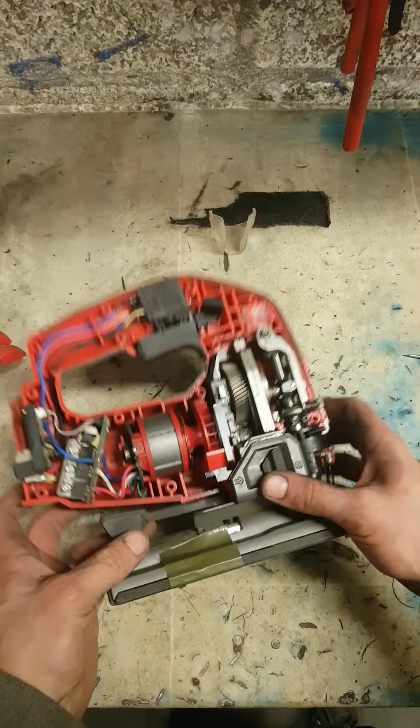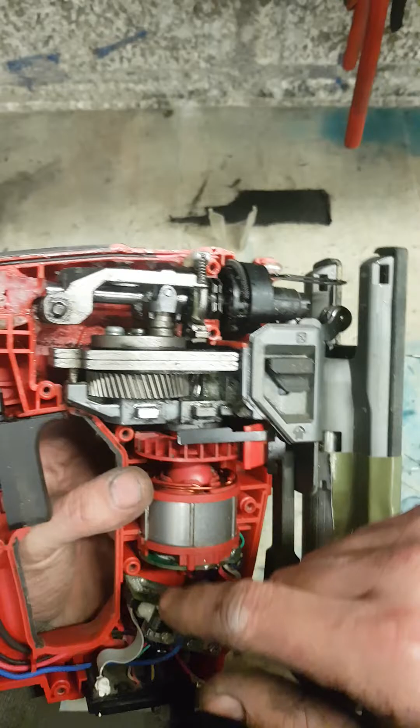Jesus, there's not much to that one. Tiny little motor. Not even an actual enclosure or nothing for the gearbox. Same as the wee cheap Bosch one.

See, this is why I have problems with Milwaukee. Motor assembly is gone on this jigsaw. This part here, not worth fixing. It's going to cost about 170 quid to change this here. Because it's brushless, no big surprise, you buy this whole assembly.

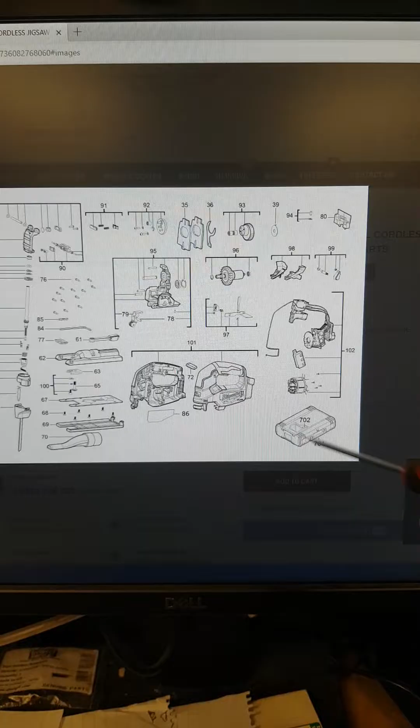Milwaukee, as you can see from these lines, had planned to sell this field and the controller separately, but then changed their minds and instead grouped them all together as one piece. So that's not separate, you have to buy all that together.

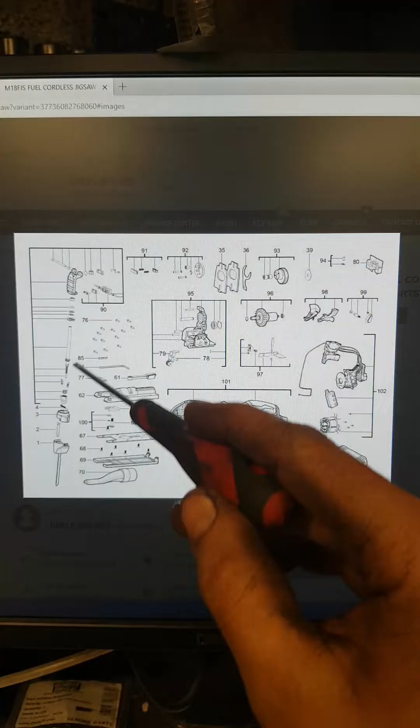Same as everything else on here. Your tool holder that actually holds your jigsaw blade, all that there, that's all one piece. Part number 90, item number 90. All the wee shims, screws, packers, guide rails, the actual blade itself, holders, wee connector at the bottom, everything for actually holding the blade.

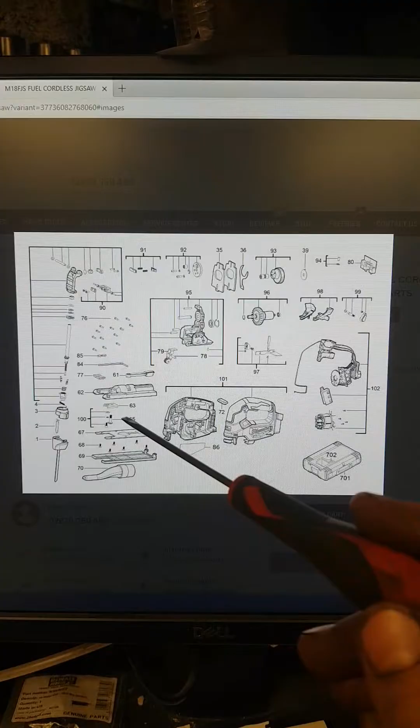All one piece, can't buy them separately. Only thing you can get is a wee plastic cover, that wee spring at the front, which just never goes, and a wee plastic boy you hold on to, twist and turn to release the blade. You can buy that. Everything else, all one piece. So any time your Milwaukee jigsaw won't hold on to the blade, that's it.

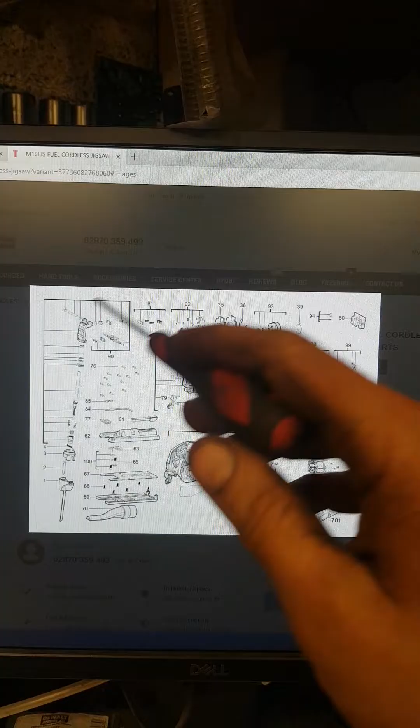You're not going to be fixing it. Same as everything else. Actual gearbox assembly, housing, again, all one piece, even down to the bearings. There's your rotor. Can't buy the back bearing on its own from Milwaukee.

You have to buy the whole rotor. Front bearing as well, can't buy it. You have to buy the whole gearbox mount. So yeah, that's why I have a problem with Milwaukee.

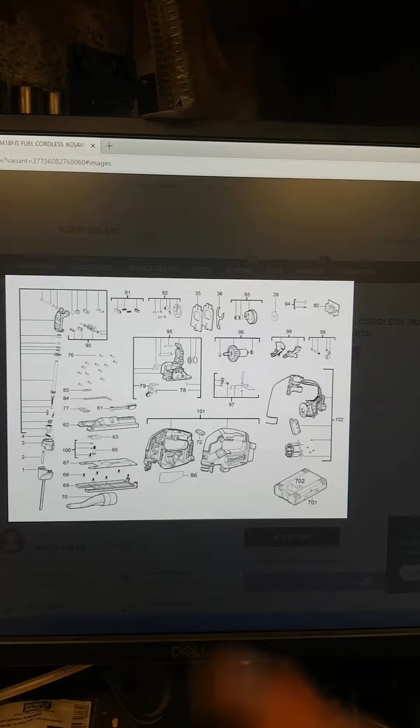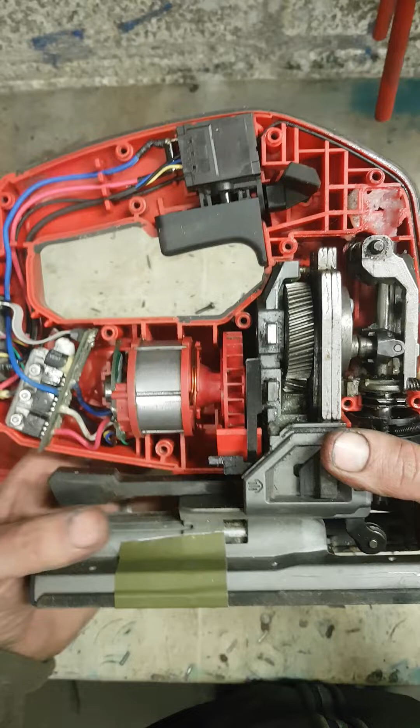They picture all the parts, but they don't sell all the parts individually. They group them all together. So if you wanted to change your bearings and just got the parts from Milwaukee, just the two bearings for the front and back of that rotor, you have to change the whole rotor, all them parts there, part of that whole housing, just for two bearings.

And if anything goes wrong with your tool holder, apart from this plastic piece and that spring, you're not going to be fixing it. All this here, one complete part. So if your blade holder starts to get a wee bit slack, you can't even change the guide bushings or nothing. That's why I don't like Milwaukee.

The size of that machine as well, the scale of it, it's all to make it look big and beefy, but inside that's a lot of empty space. €250 for that machine body only. Not worth it at all.

And just in case you think it's an old machine, it's only 2020, and it's obviously done nothing. What a shame.